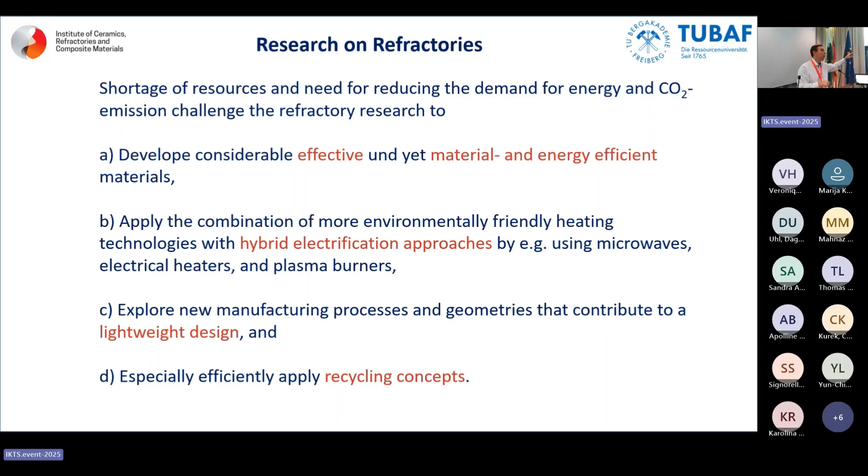So today I will show you some special structures like lightweight design, because on one way we have big masses, but can I make a composite system? That means a thin wall, fine grained, in a big coarse grained system - a kind of marriage to combine properties. We are also going to deal a little with hybrid electrification approaches, and we do not underestimate recycling - not only recycling of our materials, but also recycling and upcycling of refractories from other sources. So for someone it could be dirty, but for us it's a gift.

Imagine we don't speak about small samples, but bigger samples in metal. Especially everything that deals with thermal shock - we saw yesterday very nicely the impact of pore size distribution and pore morphology. So one key in order to get the compromise is the porosity and how you can distribute it.

Yes, with pores or with micro cracks that I can create, I can improve thermal shock performance. But especially if I need a pure material, like alumina, for a gas burner - not so high temperatures like 2000, 3000, but let's say in the range of hydrogen firing - then I need pure alumina, and I have to get improved thermal shock performance. So on one way, micro cracks. On the other way, can I integrate heating elements in my gas burner to improve things, because thermal gradient means thermal conductivity, heating from inside to outside.

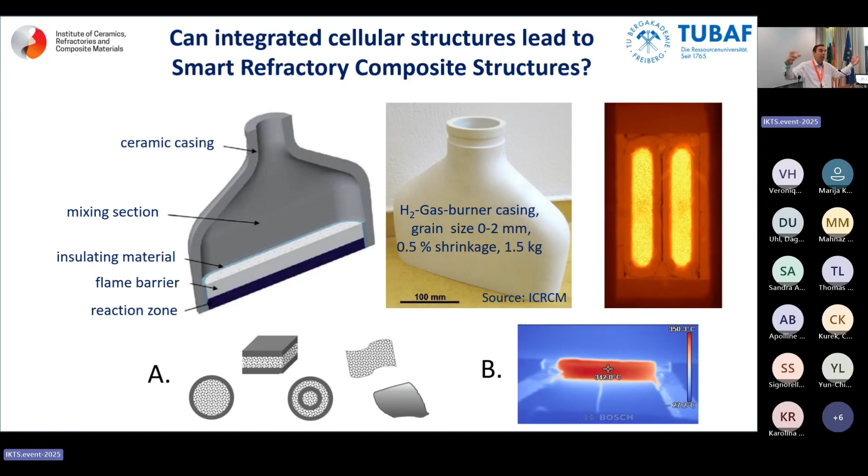So the trip has started - environmental friendly, sustainable, and efficient. And we need the young guys to get this trip together to Ithaka. It's not a labyrinth. We need new ideas to succeed.

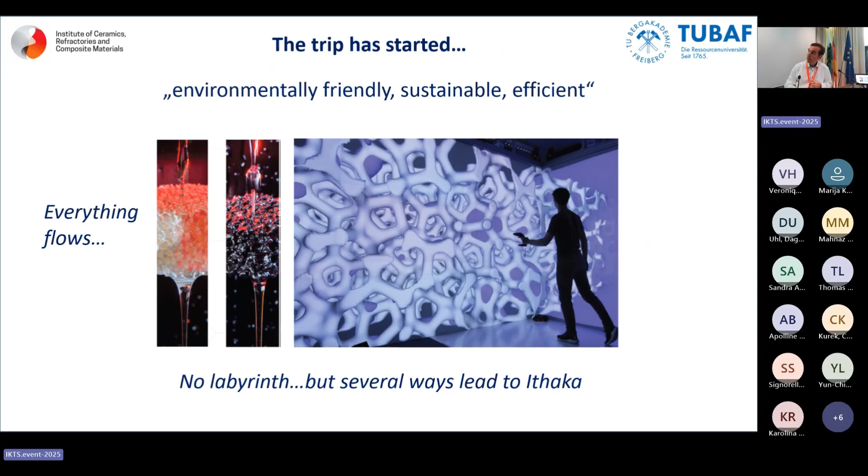And everything is flowing. These are some projects - results from the German Scientific Foundation, as well as with some industrial partners. I would like to start with 2009, a project also called Fire. Some guys from Fire, the real Fire, said 'oh, this is the German Fire?' No - in German it's Feuerfest-Initiative zur Reduzierung von Emissionen, refractory initiative to reduce emissions.

And we have dealt, for instance, with alumina, zirconia, titania systems. Yesterday we saw very nicely the aluminum titanate, how it behaves - it dances, it breathes when you heat up and when you cool down. But in this case, we just formed aluminum titanate in situ and decomposed it during thermal shock.

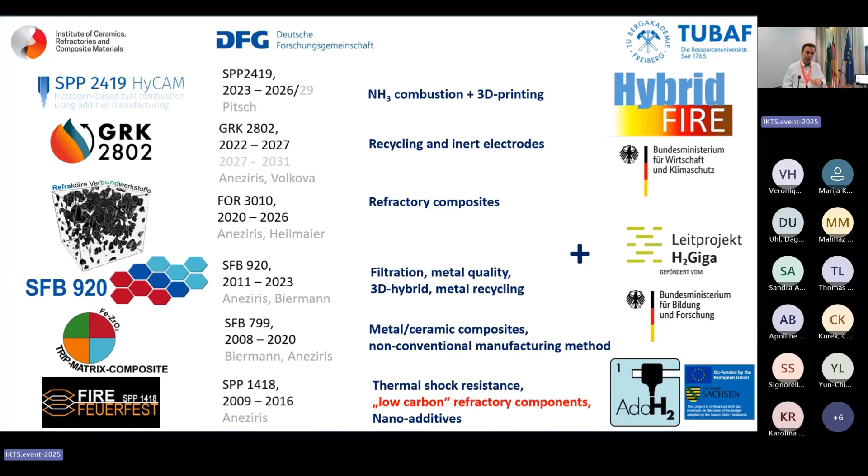Because then you have volume expansions or shrinkage in volume percent. These are grains that explode and make microcrack patterns. Of course, you have to control these things.

Yesterday, Alexander Michaelis showed you the universe of solid oxide fuel cells, electrolyzers, and all these kinds of things. Once again, to underline it, we are here in refractories, but functional ceramics and metal ceramic composites are the key issues for the transformation of energy. And of course, we can combine these issues with our materials.

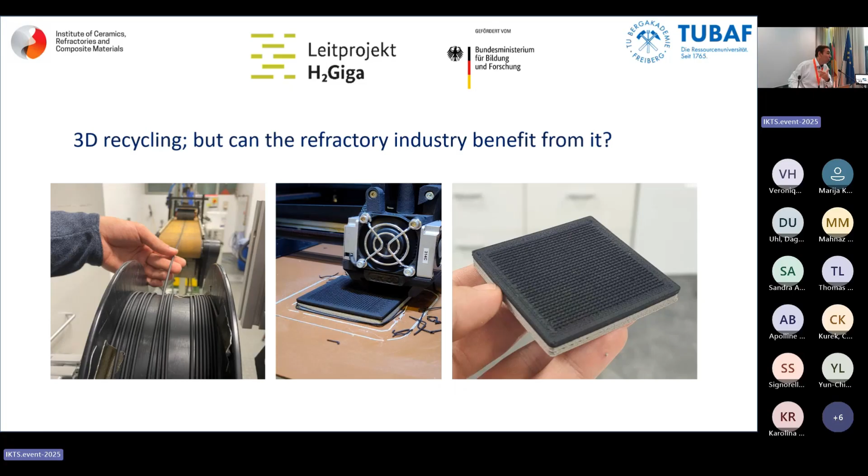Somebody would say, how? For instance, in Freiberg we are dealing with recycling of such electrolyzers. Yes, we can print, we make our own filaments. Here you can see a recycled, printed solid oxide fuel cell. But again, we have some issues with contaminations, which do not give the efficiency. We are interested in the scandium zirconium or lanthanum strontium manganate in this kind of issue.

And somebody would say, how do you mean it in terms of refractories? I can add it in a carbon bonded electrode system or a stopper or whatever. And what we see here is the refractoriness under load.

The red curve is a carbon bonded alumina with 2% recycled lanthanum strontium manganate. And the blue curve is the traditional carbon bonded alumina with approximately 30%, plus antioxidants in the form of something like 4% silicon, pyrolyzed at 800 degrees and pyrolyzed at 600 degrees.

And we see if we add the lanthanum strontium manganate, we can avoid silicon metal, and we can also go 200 Kelvin lower with the temperature. So these are reactions that help us.

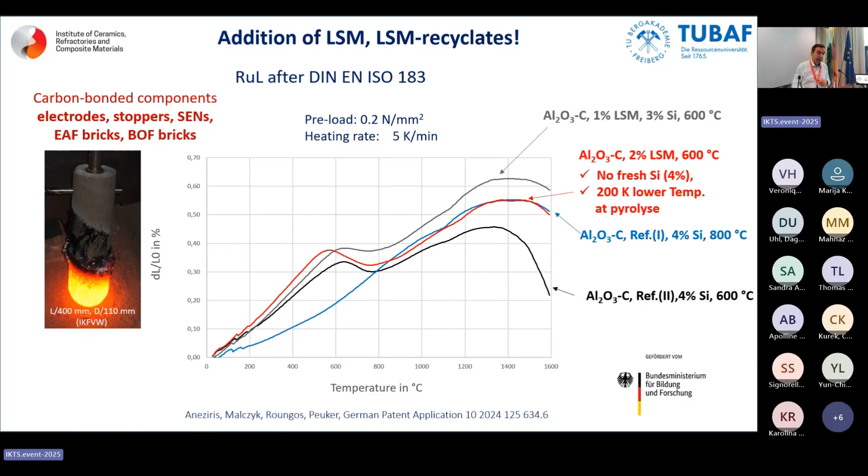If you say additive manufacturing, we started, we didn't call it additive manufacturing, but it was something like 2.5D, making spaghettis, not pizzas, spaghettis. And somebody would say, why spaghettis 400 millimeters? Because we wanted to filtrate pig iron, and the bigger it is, the higher the filtration capacity.

It was an extruded issue, based on silicon carbide. Of course, you can do it also with zirconia, but keep in mind, silicon carbide is an electrically conductive material, a semiconductor, as well as at elevated temperatures. Also, zirconia above 1000 degrees Celsius becomes electrically conductive. Yes, we have also the oxygen and all these kinds of issues, but these are functional materials.

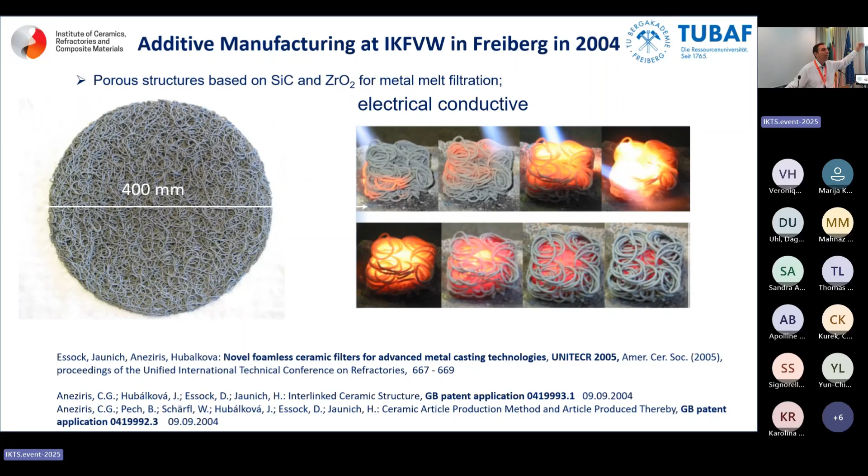We can activate them. And keep in mind, aluminum oxide, above 1000 degrees Celsius, has 10 to the power of 4 higher electrical conductivity. So these are issues in order to meet the demands for going to smart refractories, as Hong Peng mentioned yesterday.

In 2024, my guys are experts today at printing filaments or based on filaments. Of course, you can also cut the filaments and go to pellets. It's much easier because you don't need the flexibility of the filament, and as you know, our materials are not flexible. In this kind of issue, you can use much less binder.

You will see this tomorrow, how we can print and how the printer works. You can make our own filaments, but keep in mind, granulates or pellets need much less binder. So on one hand, and one basic issue for us, is we can do thermal debinding, not chemical debinding. So guys dealing with debinding, this is a very interesting issue.

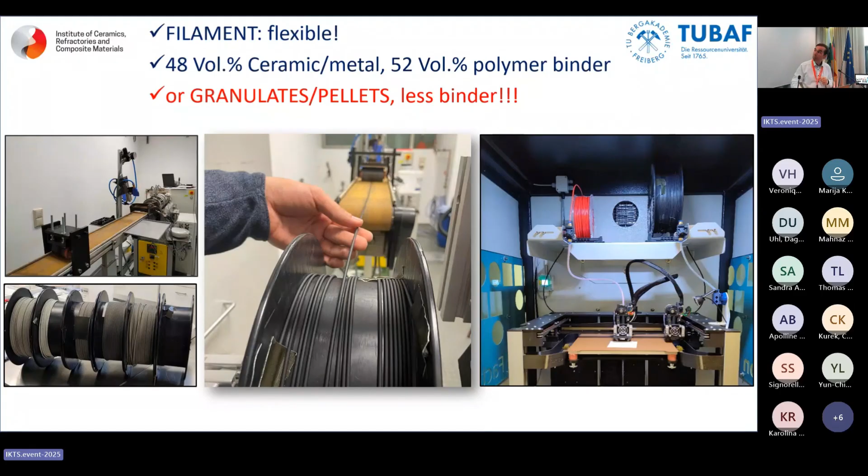Of course, you have to meet the demands of tolerances. So you see, and now we are printing. In order to meet the tolerances, yes, it has to dance. It has to go where you want it to go, no? But not too much. And please stop the dancing now when the music stops.

So this is one very interesting issue. You have to add additives, no, in order to control it. And somebody would say, why are you doing 3D? I'm doing 3D not only to mix or to have the freedom of shapes. Me, as a refractory guy, I can position the pores where I want.

I can position the pore habitus as I want and where I want. This is the key for us. We are not experts at making very high density structures. This is not the key.

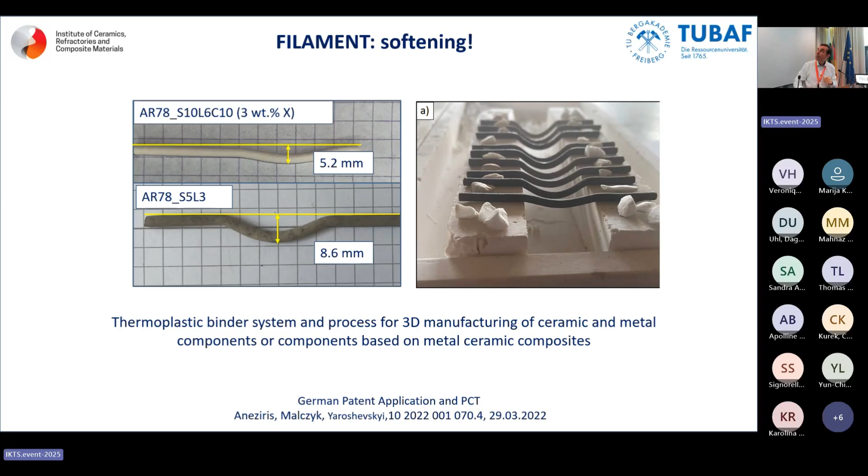Yes, we want to make macro pores, macro channels, where I have to be tight, high density, corrosion and erosion resistant. But the structure behind could be not so dense, in order to be able to withstand thermal shocks. No? Play with materials.

We see you can make steel inside if you want to fix it with an anchor, and ceramic outside. And of course, as John mentioned, you will have a distribution of the phases, as a gradient structure, which could withstand thermal shocks.

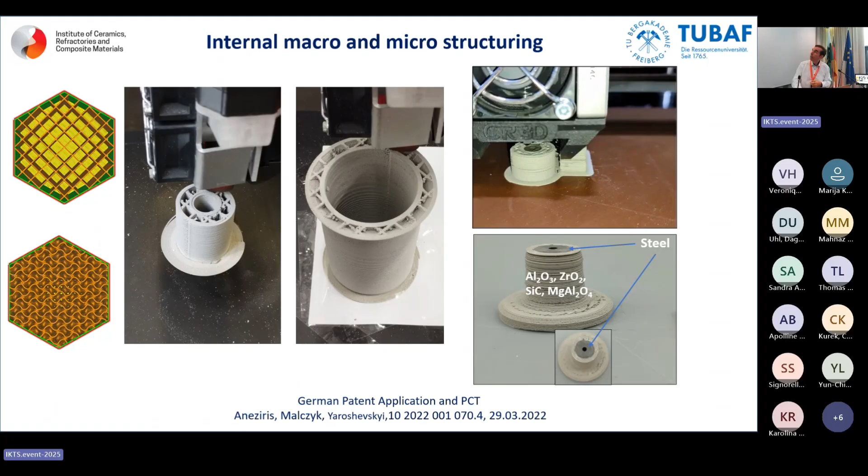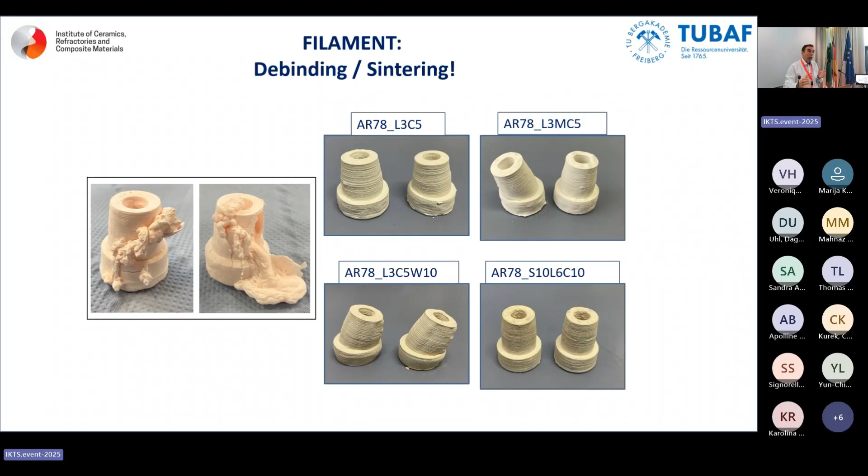Of course, up to coming to this moment, you can make arts in the beginning, as we see on the left. Perhaps the price is much higher from the original. But at the end of the day, if you control the debinding and especially the sintering, yes, you can create such kind of nozzles after printing, after sintering.

You have an inside with special properties. You have a light structure between the outer, and of course we know you can. It could be that the outer is like a belt and puts under compression the inside, so you improve the thermal shock performance on one way.

On the other way, we have a filament, so layer by layer, and this is something like the aragonite structure. And if I can also make micro cracks, we know from the flame spraying processing, I have excellent thermal shock performance. Okay.

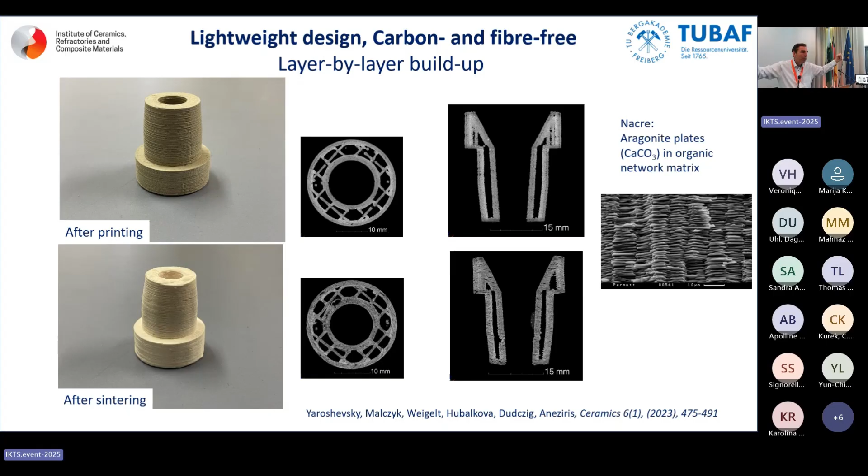Yes, today the printer guys, they can print pore structure, and then you can also machine in green stage. So you have the porosity where you would like to have it, and you can close the pores via machining. And high speed.

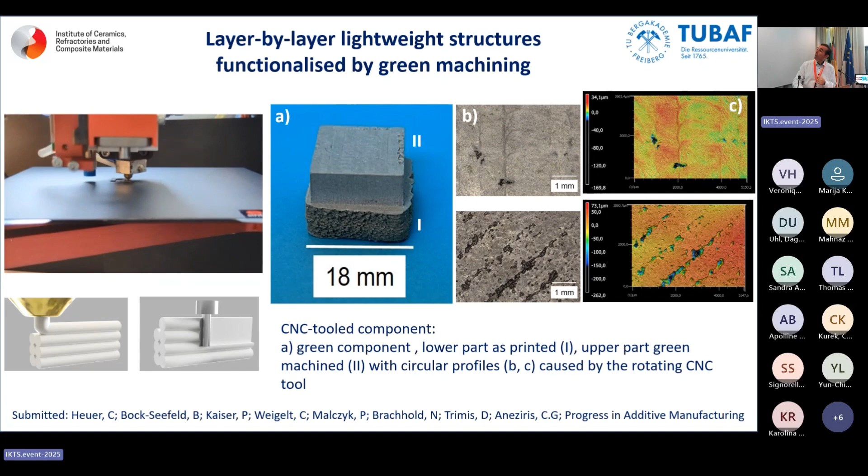And then, of course, if we make the piece, I have a fine-grained refractory material, and I have integrated it in a coarse-grained refractory material. I'm going to the steel casting simulator that we have in Freiberg, you'll see it tomorrow.

Yes, it's a drop in the ocean. It's only 100 kilograms that we can melt, but we can select all the insides and outsides as we wish. We can design the steel.

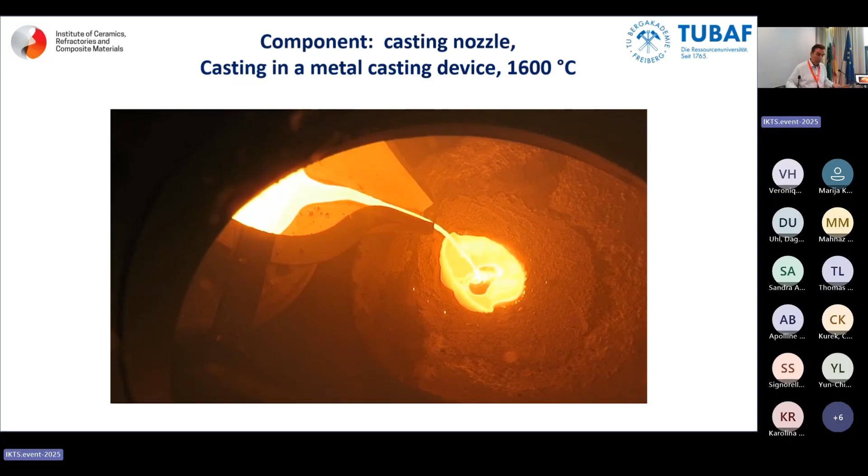This is very important. And somebody would say, okay, nice talking, do you survive? Yes, we survive. So steel melt in full controlled atmosphere, so we know what we are doing, hopefully. And we see that we survive.

A pure oxide, and it was a spinel. It was an alumina Almatis 78 spinel. Survived. It was fiber-free, because they burn fibers out, carbon-free. Yes, we are dealing also with carbon-bonded alumina, but we put self-glazing systems.

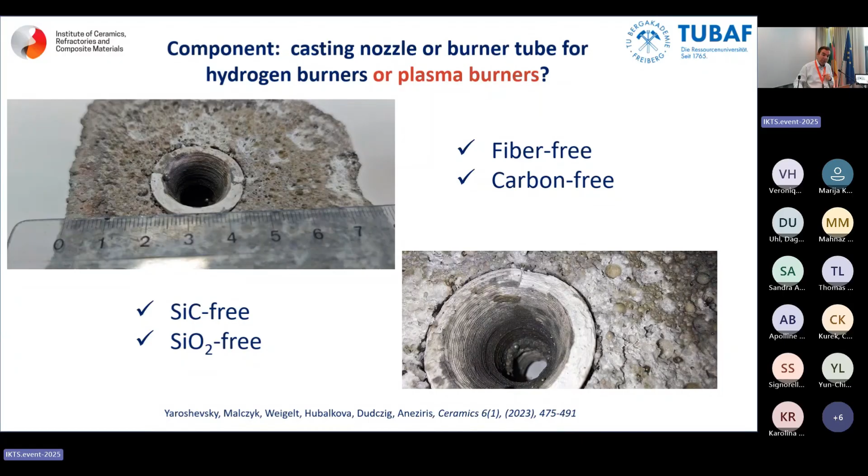Silicon carbide-free and silica-free. And yes, if you survive, is it perhaps a material or a processing route for hydrogen burners or for plasma burners? Plasma burners we will see immediately.

And somebody would say, is the technology very difficult? No, it's the normal ceramic technology as we know it when we make extrusion, okay, with filaments, and then we go to printing and debind pieces.

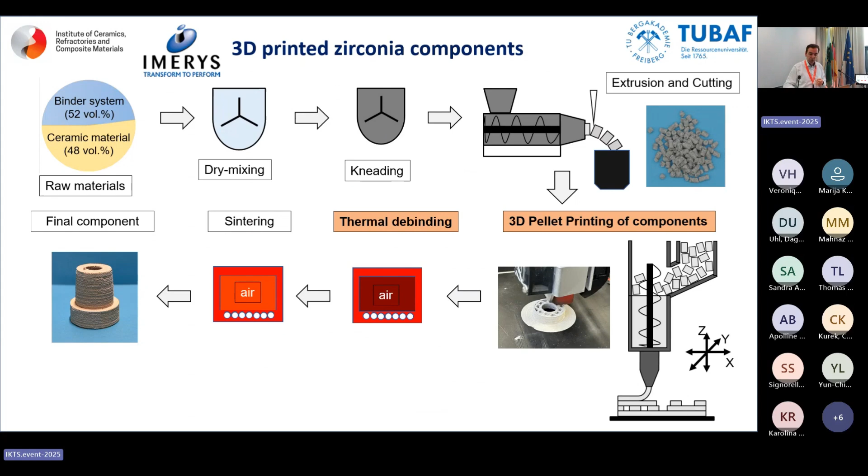Some pictures, yes, you can play and you can use artificial intelligence to create structures, and so it's fantastic, but okay, it should have a meaning - how many layers you do, why you do it, and keep in mind costs, energy, and so on. And at the end of the day, you want a functional product.

And I will stay to zirconia. And we see also IMERYS, it's a project with Chris, because zirconia is a very fantastic material. We know monoclinic, tetragonal, cubic.

The question is, what kind of phases do you really need? Not a fully stabilized, no? You need a high amount of tetragonal and tetragonal metastable so that you can create, when you need it, cracks.

Of course, you have always to pay attention. You have at 1170, for instance, in a special system, the transformation from monoclinic to tetragonal or tetragonal to monoclinic. Do my microcracks that I have created, are they still there or are they healed?

So you have always to create microcracks, but you have to keep in mind, I want to have them when I need them. Take a part of a submerged entry nozzle. It's first preheated up to 1100.

Then it moves to the casting machine. It goes down to 900. And then you have a thermal shock upstairs, to 1600 when the melt comes.

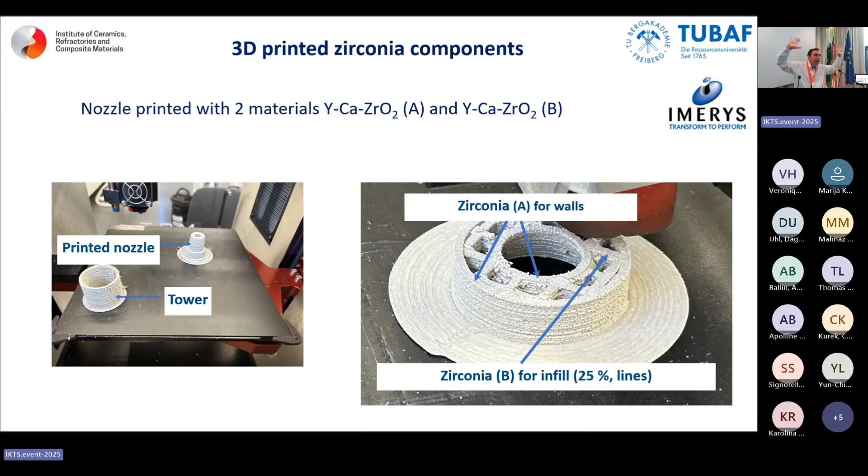And of course, you have to keep in mind, it's a product - after it has been used, it's going to lose its neck. It's a one-way product. It's not going up and down like a ladle. So completely other design, and keep all this always in mind.

Yes, you can play with the zirconias and you see a double kind of stabilization. Why? Because we have found out that the tetragonal is very important. Yes, you have also, based on the monoclinic, due to the expansion, created grains of monoclinic. Yes, but you lose some of them when you increase the temperature. So you need them and you have to trigger them when you really need them.

And during sintering, you lose some of the stabilizing agent. So you want to have a support of the other stabilizing agent and get in touch with something else which also improves the compression. Somebody would say, how do you know this? Yes, you can use EBSD, electron backscatter diffraction, and you can, in the scanning electron microscope, identify the phases. So the tools as they were when I did my thesis are today in such a state that I would like once again to study.

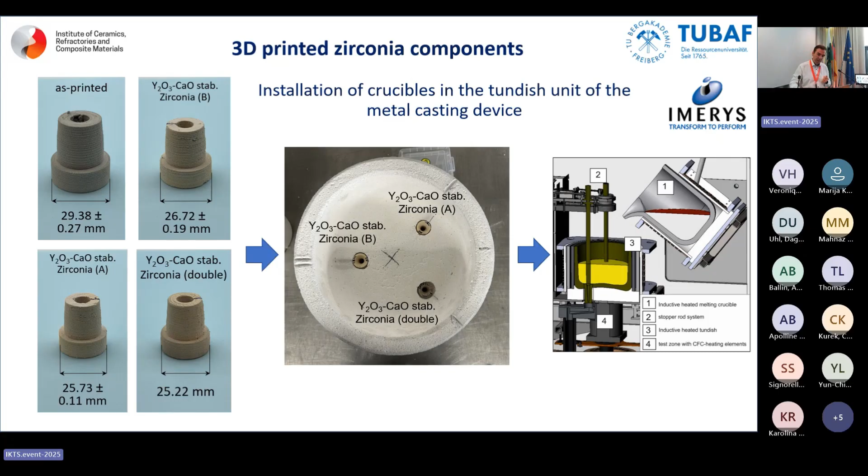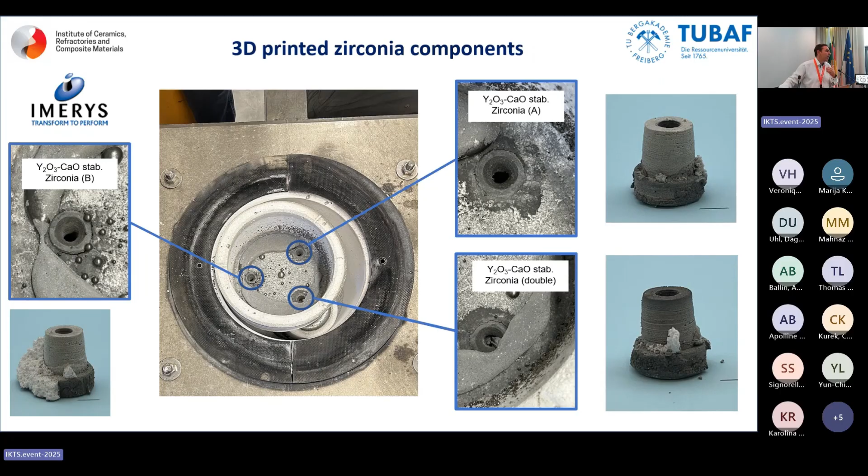Yes, you survive thermal shock, and you several times survive the thermal shock, in spite of the fact that it is a fine-grained zirconia material as it is used in solid oxide fuel cells. Of course, not scandium and this kind of things. It's magnesium or calcium or yttrium. And of course, you can design everything that you need. This is a fused alumina system. You can make nozzles, crucibles, and you survive.

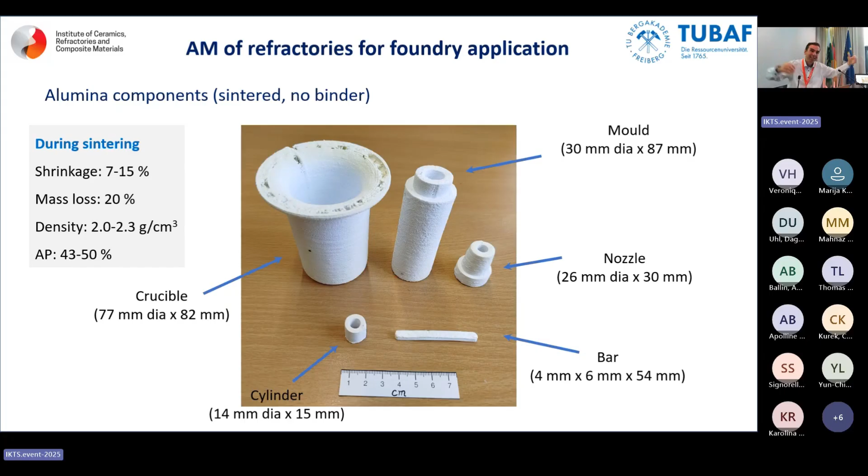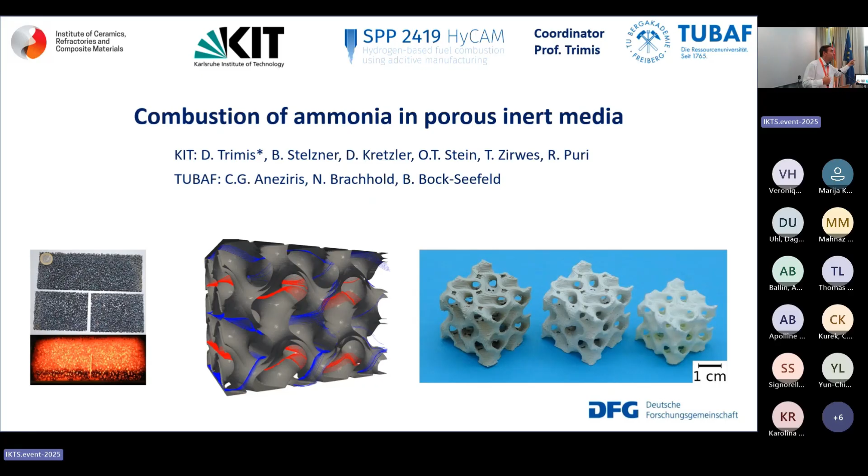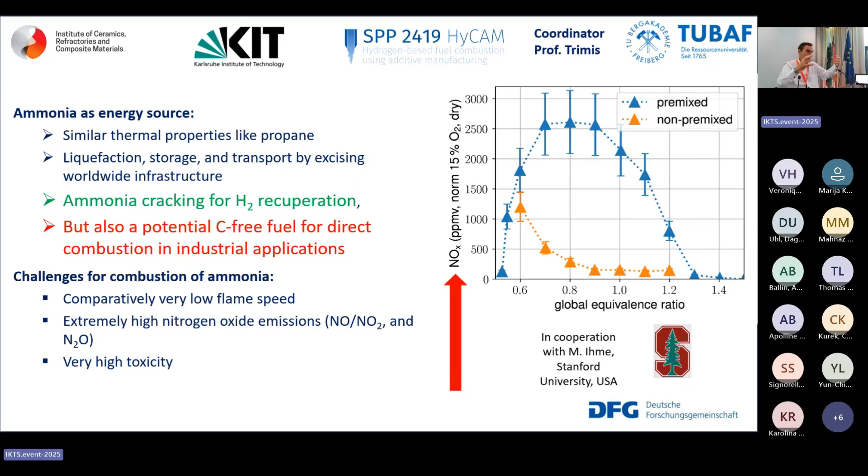Somebody would say, is it an easy issue? And why do you want a special gyroid structure? It's not a foaming structure, it's a gyroid structure. Why? Because if you put air and directly NH3 to fire H2, you will get a much higher amount of NOx. And you don't want to say CO2 out, but NOx high. So you have to get a compromise of the processing issue.

And it's not only a gyroidal structure, several pore structures have to be combined, have to be engineered by young guys like you in order to meet the demands of the combustion. And you have to do it not only fine-grained, you have to do it also coarse-grained. Because you don't need only small issues, you need also big issues. Yes, again, you can print, you can pelletize, you can make some kind of gyroidal structures. But of course, you can use also two nozzles.

It's going to change because I want to have, for instance, alumina. Alumina is the material, but I want to put silicon carbide in the inside in order to improve the thermal shock performance. Or I want to put an AZT system. And we see here the behavior, the crack resistance of this material, where we have added 2.5 magnesium stabilized zirconia and 2.5 titanium. And we see this kind of behavior, not the classical, as we have it in ceramics. So it's like a sponge according to the heat, the mechanical stressing of the material.

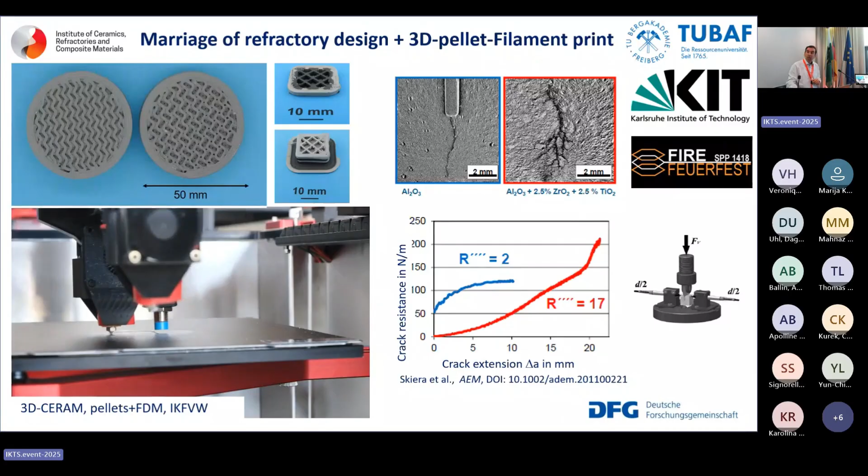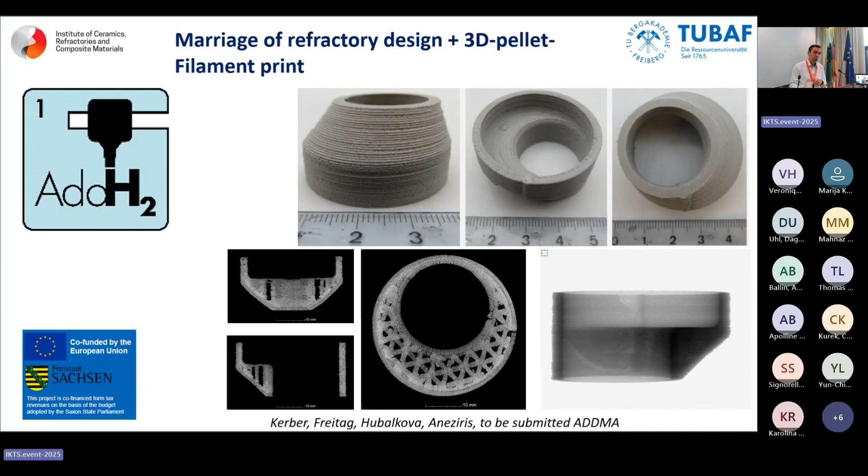And of course, if you have good materials in means of thermal shock, you can also think, yes, let's go with pure alumina and make H2 approaches. I've spoken about microwave plasma burners. Somebody would say, why? On the one hand, it's a direct use of electrical energy, so I don't have to transform it. Yes, if I have to store, but I want to use it immediately. We do not have a microwave coupling, as we did it in 1991 when I was in Nottingham. We only heat the air, like a CH4 burner. And we do not need any cathodes.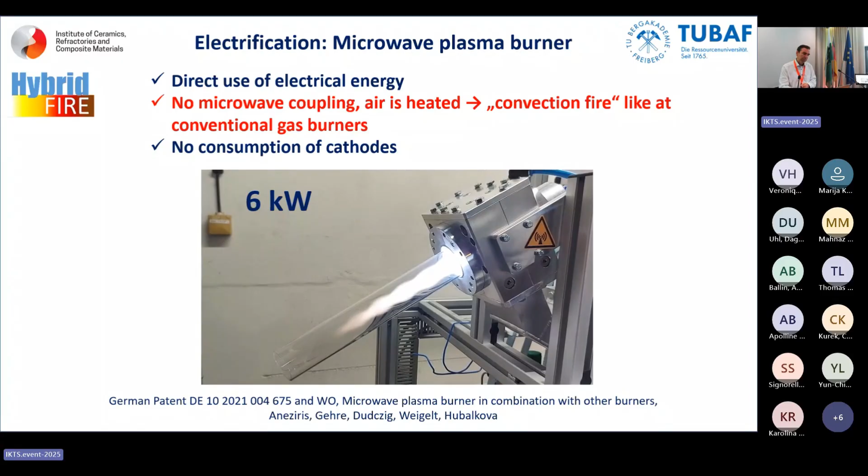It's a little bit loud, but it's an easy approach, something like 6 kilowatts. We have started with this system. Of course, somebody would say 6 kilowatts, it's not enough. You have to increase. And of course, we want to go to this technology, and not only microwave plasma, but also induction plasma and so on. Why? Because sintering is the most energy intensive process with approximately 70% of the whole energy consumption. And keep always in mind, if you have a tunnel kiln, only 10 to 15% goes to your component. Everything else are losses.

Of course, if we are going to be successful, we would like to put it at an industrial kiln to see how we go from the laboratory to a really industrial application. And the red arrows that you see here are 65 CH4 burners. Of course, we want to do it successively, step by step.

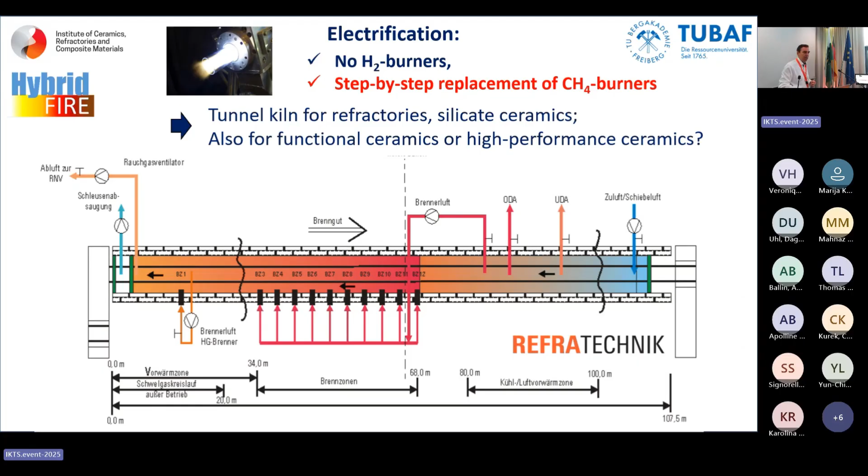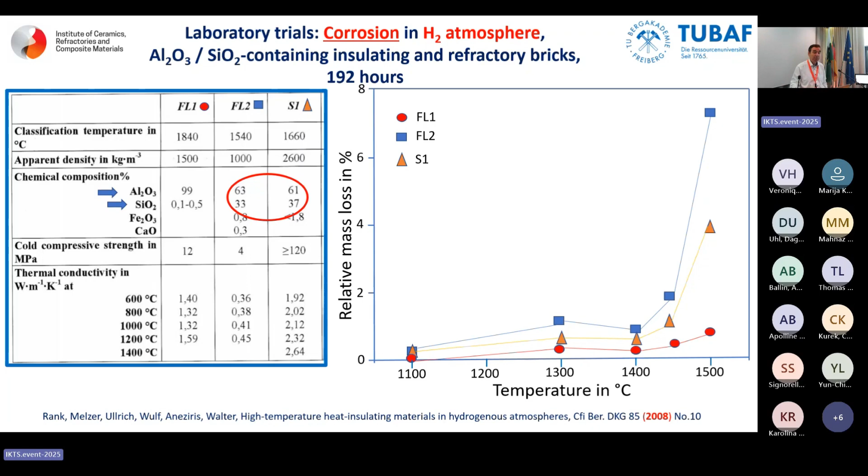Somebody would say, why? The why we have seen yesterday, because when we have an H2 atmosphere, we have H2O atmospheres. And we have seen here in 2008 the impact that if we have not used pure aluminas, but also alumina silicate systems, above 1400 degrees, everything goes in the air. What we have done is we have made a pre-treatment of original MgO-based bricks for the cement rotary kiln, and we have used 200, 400, 600 degrees temperature in a pre-treatment, natural gas 100%, 100% hydrogen, the blue ones, and a 50-50. And then we have fired them in the Refratechnik kiln that you saw before at 1600 degrees Celsius.

I would also like to underline, pay attention, the 200 degrees pre-treatment with hydrogen gave us very high strengths. If you go to the paper, you will see, based on differential thermal analysis, that the peaks of the calcium silicate formation or changing, also the brucite formation, have been a little bit shifted. It's not only thermodynamics, it's kinetics and thermodynamics.

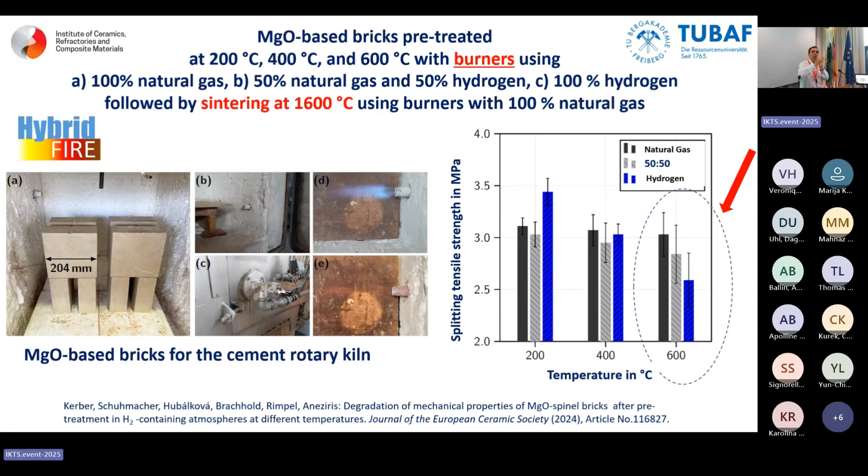Okay, yes, the small one, the 6 kilowatt, was above. Of course, we have also microwave, and we have approximately a 1 cubic meter furnace. We have a 100 kilowatt microwave plasma burner, 65 CH4, and electrical molybdenum disilicide heaters, so electrical heating elements.

It's the same trick as Bengt did yesterday. She can move the pictures. So the picture has to be like this.

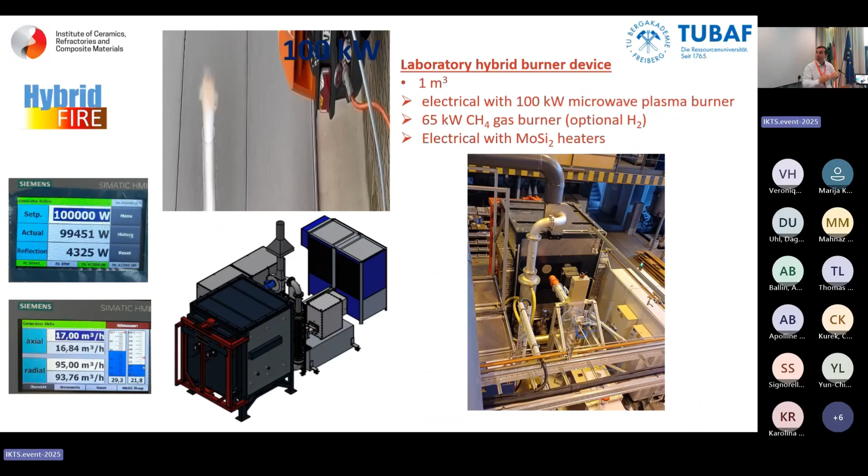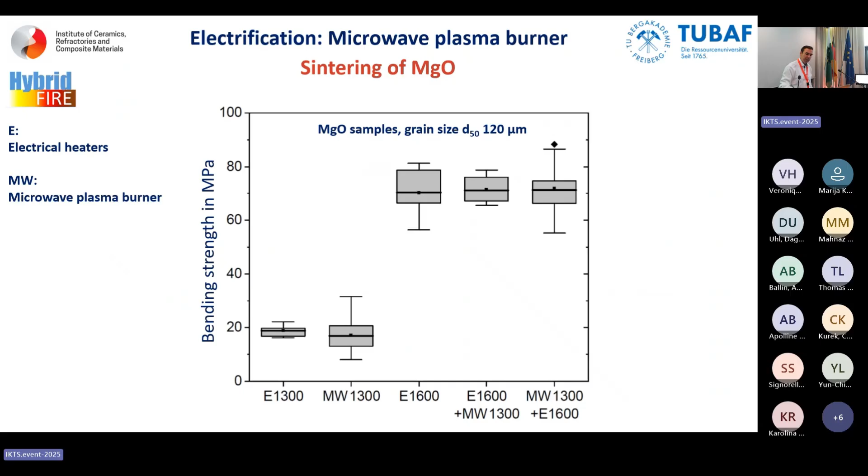We have done this. Marie Oppelt and Christine Dietzer have dealt a little bit with magnesia. We are in the same area of strengths. I don't want to go further. We have fired Tosoh 1.5 yttria stabilized tetragonal zirconia, so a high-tech ceramic. And we have seen we can heat faster. And not only this, keep in mind, I have a burner which is circulating the temperature. The other was conventional heating elements.

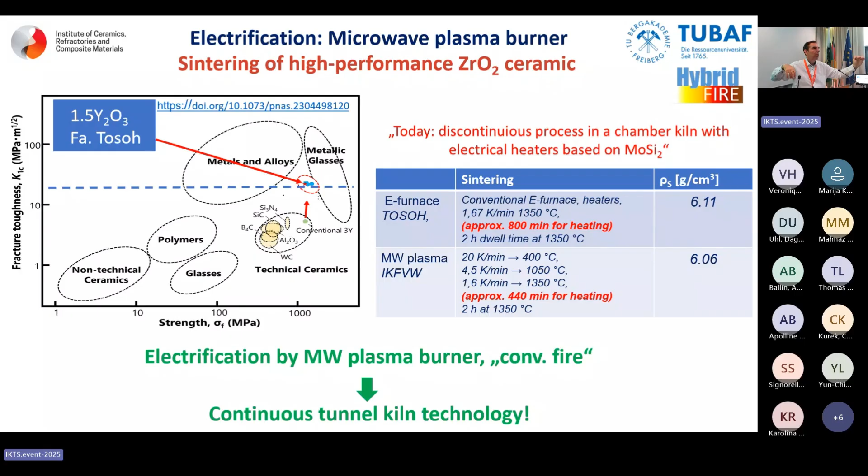As well, we have treated some bricks, alumina-rich bricks, which were in contact with a melt, iron melt, steel melt, and we have seen we have much lower wettability. We have a 10 plus increase of the wetting angle. Somebody would say why? Because the plasma burner has NOx, the plasma burner has O3. The plasma burner creates radicals. You always have, on the one hand, positive issues, but there could also be bad issues. NOx is not healthy. Ozone is also not nice. It smells like a chlorine environment.

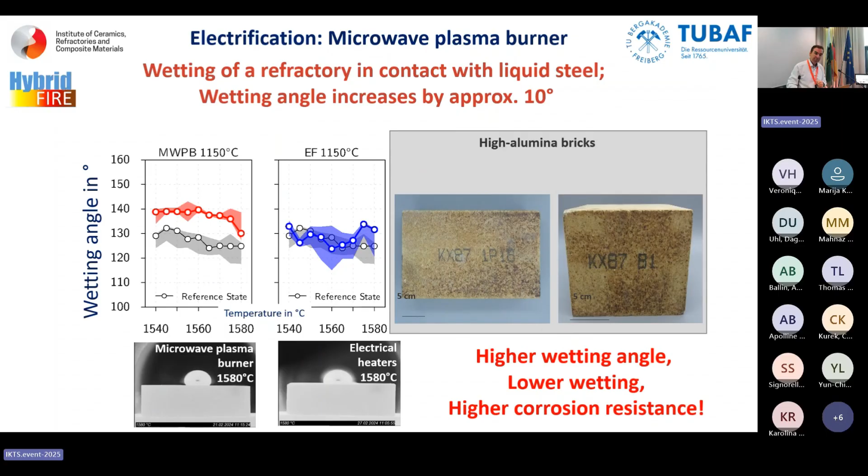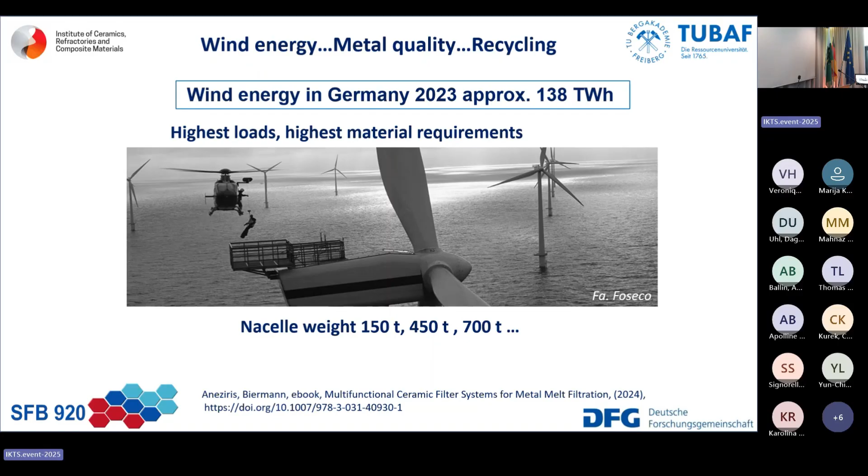Somebody would say, what was triggering this? It was an accident that happened with the ICE train in 2008, where very nice, dense, fine aluminas in the range of 200 up to 400 micrometers could not be removed out of the wheel, and so we had the damage. I suppose for 8 months, the ICE train was not moving in the whole of Germany. This was good for us because we got a project.

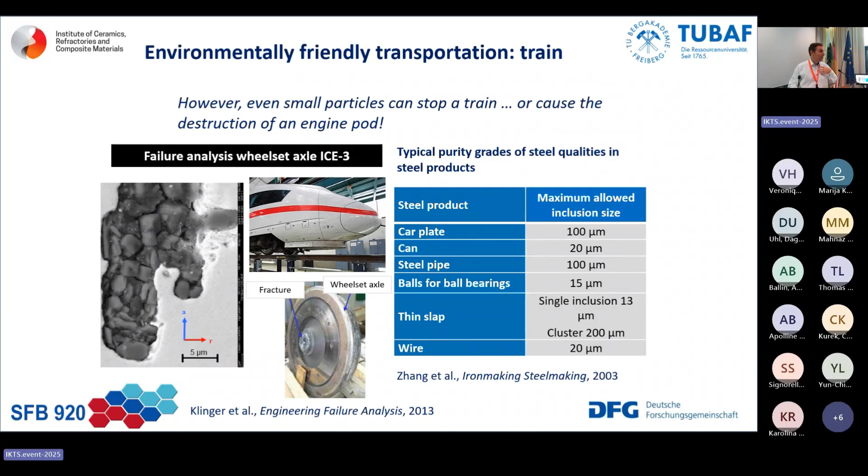We're under a confocal laser microscope. This is in the Steel Institute, Professor Volkova, but the guys are here also. And we have placed an alumina, and this alumina catches the small alumina in situ inclusions. And this was the starting point where we said, okay, let's put the same chemistry in order to pick up the same chemistry of the inclusions that are created in the steel.

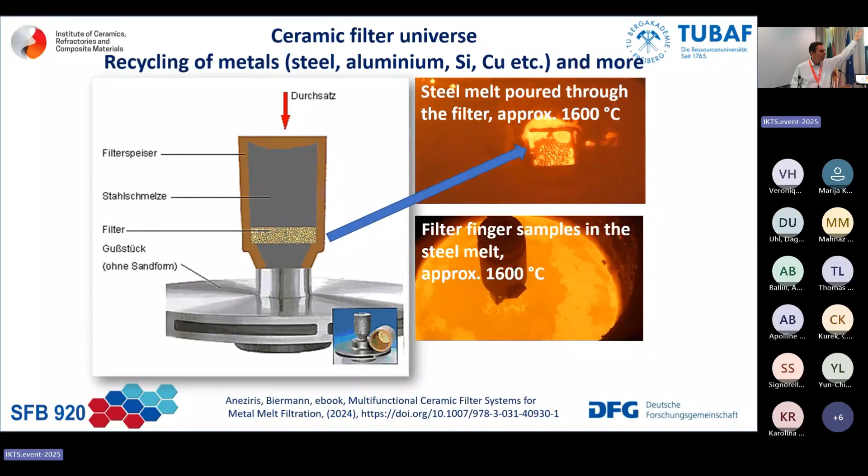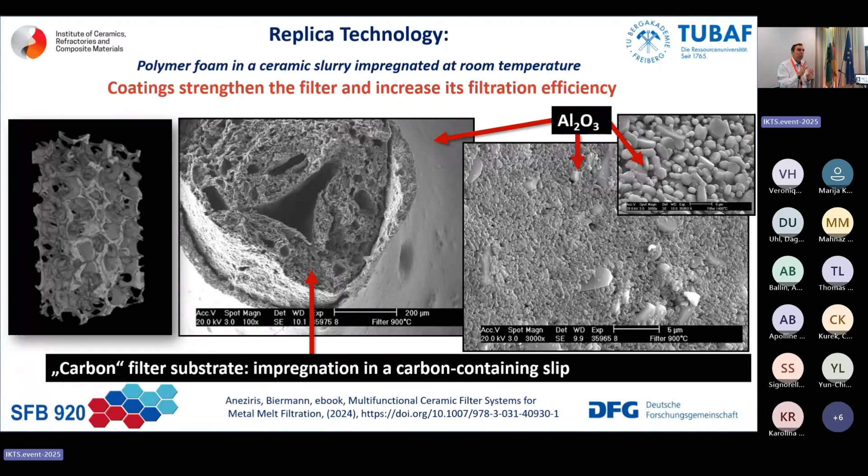Of course, the steel melt can be cleaned through the filter, or you can also use carbon bonded alumina and make bubbling in the melt. And then you can, via buoyancy forces, select and pick up like a porous plug is doing. Of course, you have to design the structure. You have to put in the carbon bonded alumina. So this is a carbon bonded alumina. You have to put aluminum oxide on the top, but you have to pay attention not to sinter it very tight, because you want to breathe with the melt, to have an exchange with the melt.

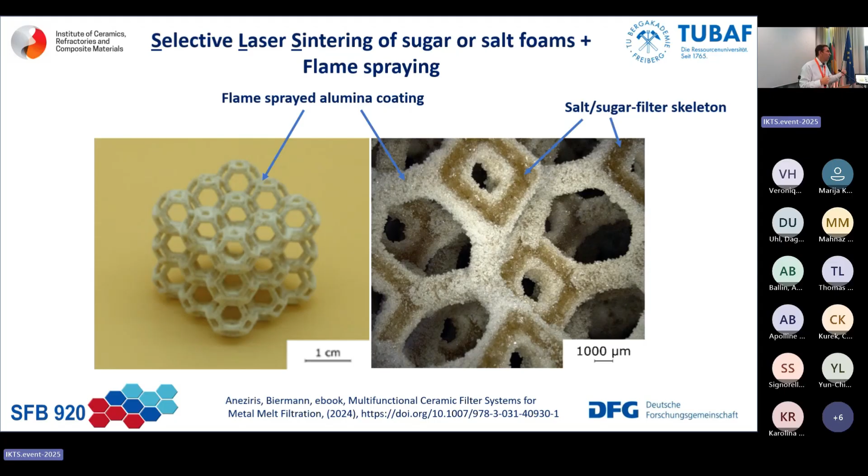Of course, if you are young, not me, my colleagues, my staff, yes, you can print sugar or you can print salt via 3D printing. And then you can go via flame spraying and create the structure. Somebody would say, why? Because I can wash it out and I do not have to burn out the polyurethane foam, the template. And you also have flame spraying, you are going to see it with the robotics. So you can not only make thermal shock, you can create some structures. And then you go to the steel casting simulator and you survive.

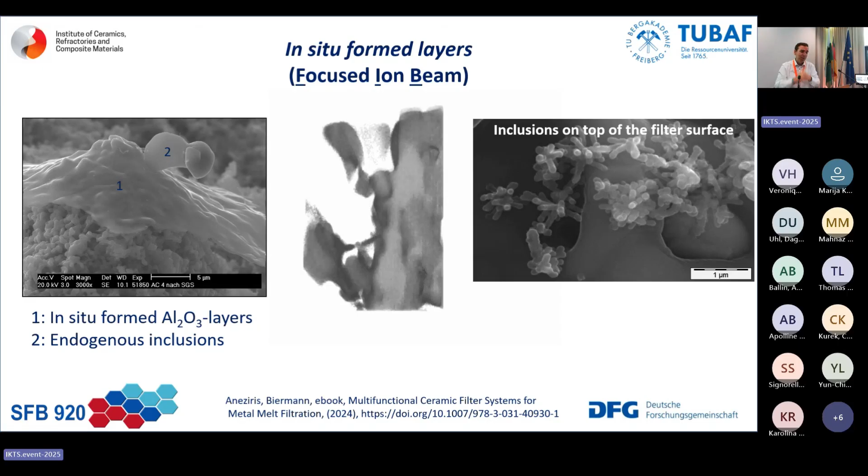And of course, today you have to go in situ with focused ion beam in order to be able to characterize much deeper these kinds of layers that are created and are collecting the deposit. In this case, a positive one. Emmanuel showed yesterday a bad deposit. Here is a good deposit because we pick up the ceramics out of the melt and we deposit them on the ceramic. It's a very interesting issue because, only this number, yes, you can filtrate up to 95% of the hard alumina inclusions in a steel melt.

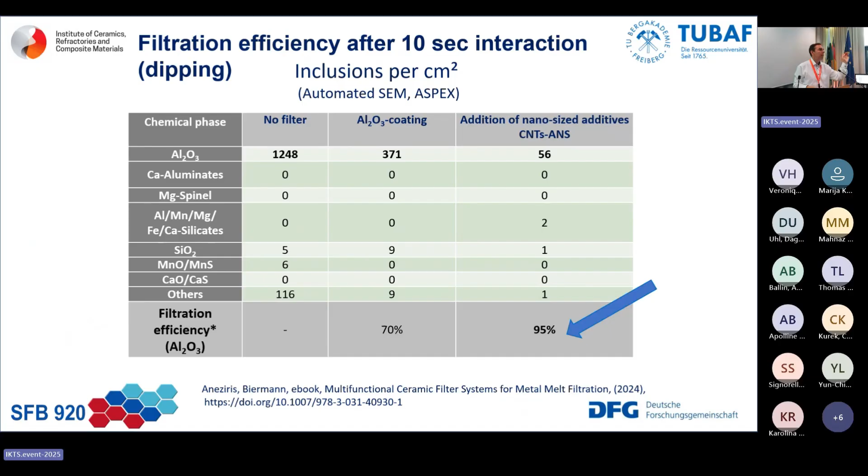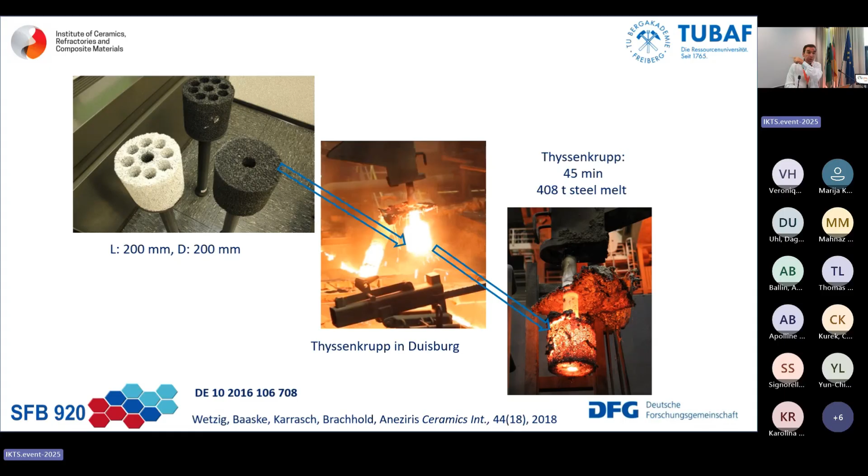The fantasy is free. You can generate a cosmos or a universe, as we say. And of course, you have to go also to the next step. You have to say, okay, let's go to a step where we can apply it in a steel plant. So yes, it has happened. It works. So this was the filter package so that we can go via the slag line and not be destroyed in the slag line. So we want to collect inclusions. The steel plant, I will only show when it comes up.

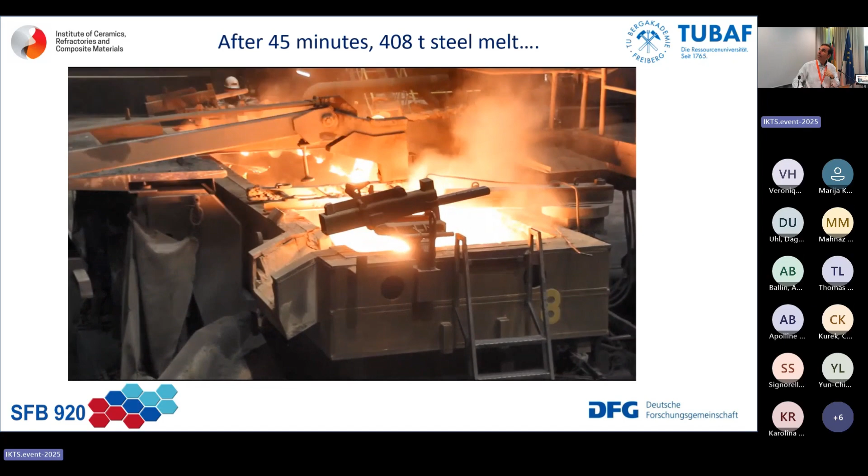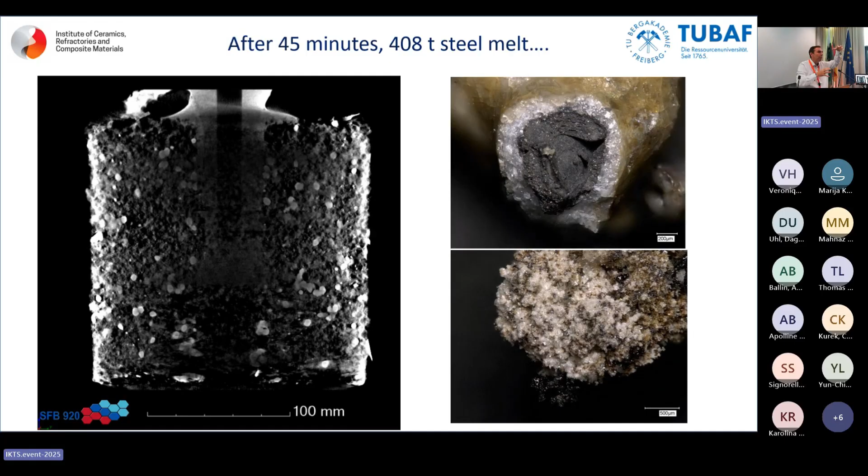And it survived because the deposits, that means the inclusions, sealed the carbon bonded alumina. So you can use the chemistry in order to improve the performance of your component. The bad things, combine them for the good things.

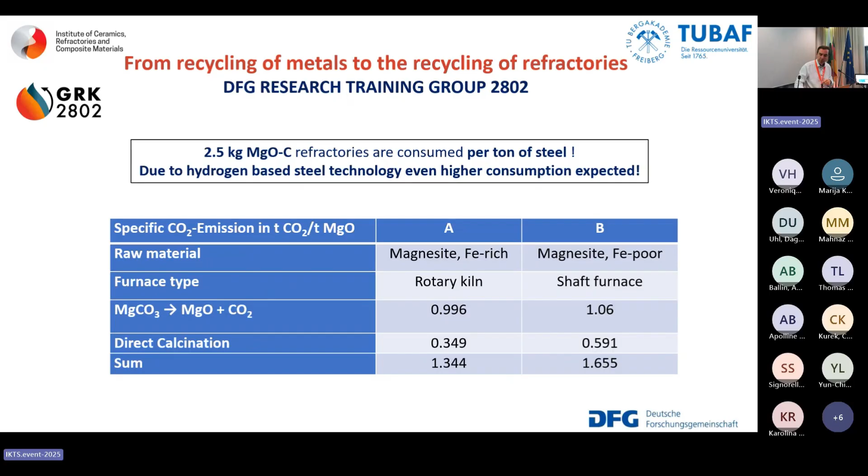Okay, let's go from the recycling of metals to recycling of refractories. It was already mentioned yesterday, regarding MgO-C bricks, for instance. And we have 20 guys here with you that belong to a school of the DFG, this 2802. This is a number. But the number means that half of them are dealing with recycling. That means they pick up MgOC refractories and they combine them with environmentally friendly binders. So no pitch, no resin. Let's use tannin, fructose, collagen. Do I get residual carbon at the same height? Do I get the strengths after coking? You can discuss with them today and tomorrow and during the ECerS.

And the next idea was, okay, let's pick up the MgOC, make MgO, and make a marriage with steel. We have made in the past, also in another center, metal matrix composites. We have taken zirconia and we have taken a TRIP/TWIP steel, and we have made a composite system and we increased the strength and the elongation of the steel via the zirconia destabilization in situ. And then we said, okay, if we can do this, let's pick up magnesia, pick up steel, make again the marriage. Why? Because I wanted to create carbon-free inert electrodes. They are not inert, they are also reacting, for the aluminum electrolysis. So get rid of CF4. Get rid of CO2.

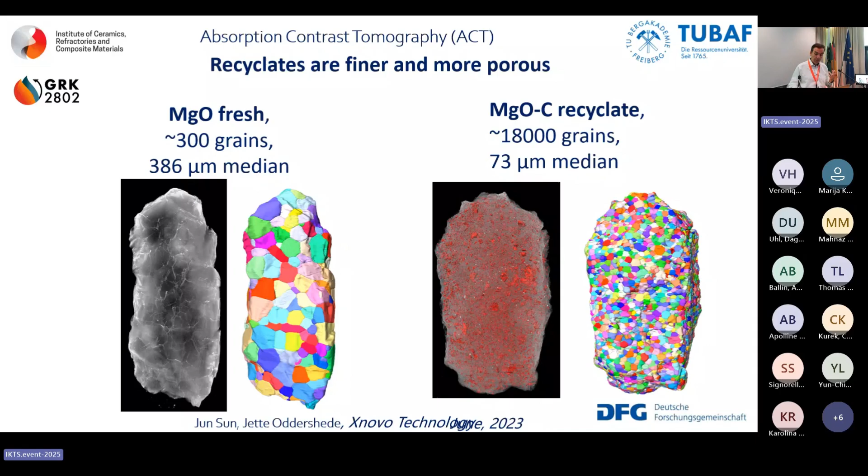Yes, the recycling is something that works, but you always have to pay attention. This is magnesia fresh. This is magnesia recycled. The grains are becoming much smaller. Porosity is increasing. It's contaminated. And the most important, the calcium to silica ratio is also decreasing. You lose calcium. And you need calcium, the calcium silicate phases and so on, in order to meet the demands of creep. But if you go and measure the inclusions in the steel casting simulator, you see, due to the fact that you have a saturated material, you decrease the interactions.

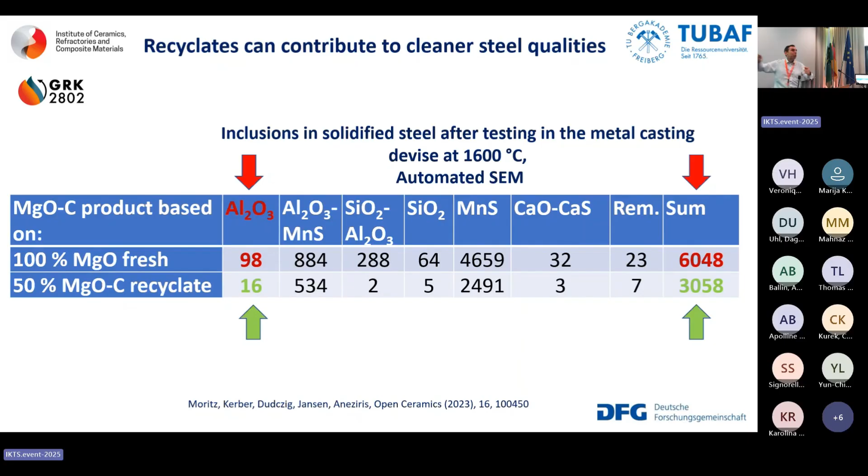Okay, let's go to the marriage of MgO recyclate with steel. You have to sinter it. Somebody would say, which temperature? Not 1600, the steel is away. 1370, 1400 maximum. Where do you sinter it? In argon atmosphere, in a carbon heating element containing furnace. You will see it tomorrow.

You sinter, and then you have to pre-oxidize. So you create spinels or other solid solutions, as we saw by Inho Jung. And this can protect or decrease the interactions with the aluminum melt. Keep in mind, when you see the presentation of Alexander, in the anodes, especially in the aluminum electrolysis, you create oxygen. So you can have also an in situ oxidation of the metal ceramic component.

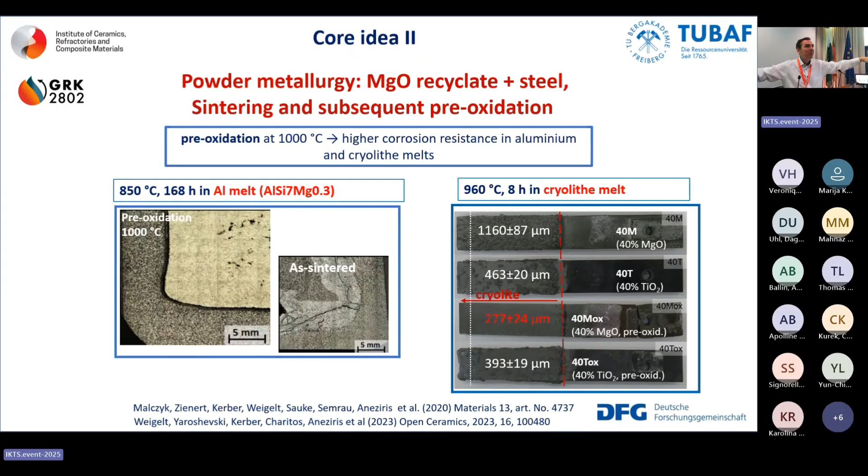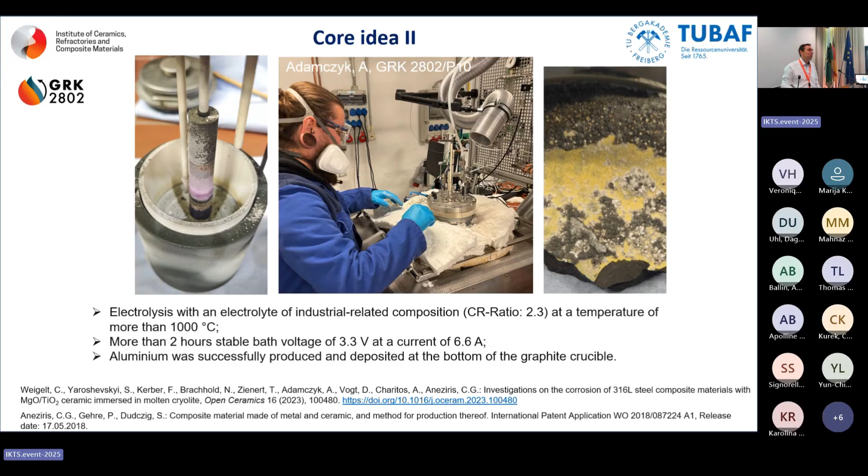And we have here, perhaps you can see him somewhere. Here it is. He's there, and with an electrode of the other guy, Serkin, they made aluminum out of it. Or you can make screws and all these kinds of things. It's the ceramic technology to a metal ceramic composite system. And these are preheatable electric conductive systems, not for steel applications, but for aluminum.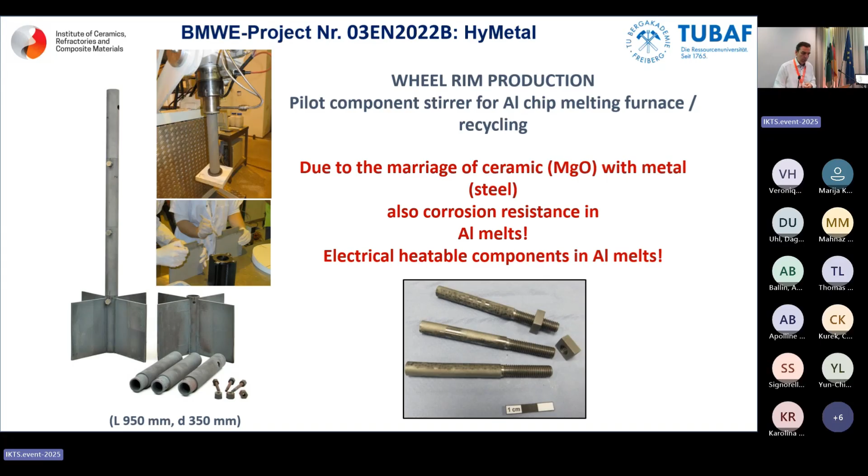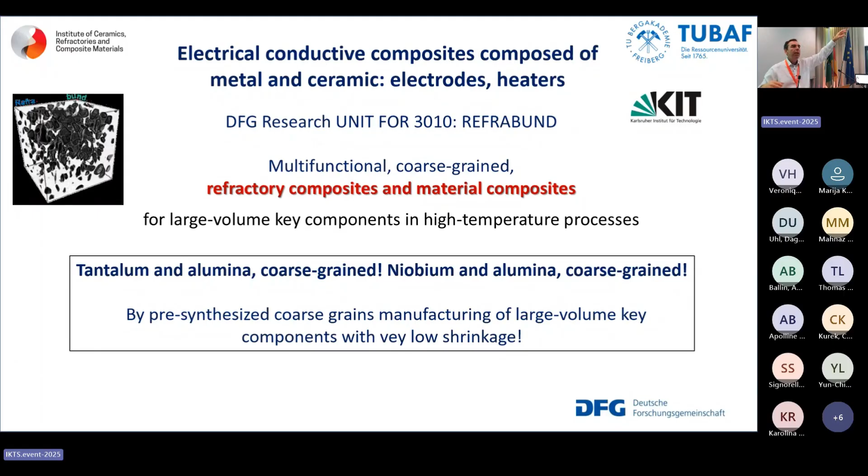And of course, because we had John before, let's go to a marriage between refractory composites and material composites by getting refractory metals, tantalum and niobium, and putting them with alumina. Somebody would say, yes, this is well known. Yes, it's well known, but let's get one puzzle more. Let's make big grains as we have in refractory thinking and pre-sinter them. Why? I want to take out the shrinkage. I want to have a pre-sintered product, coarse-grained metalloceramic.

And if I do this, I can make big components. I can make big electrodes. I can integrate these electrodes in pure alumina systems. Tilo Zienert is going to speak Tuesday, Wednesday, I don't remember now.

And somebody would say, oh, it's a very crazy issue. We have also a guy, Gregory from KIT, they measure the electric conductivity. And you see, you need not so much niobium in order to get the percolation. That means electric conductivity already at room temperature. And of course, it's a grained issue, with pores, as we know from refractories. You can recycle them, you can reuse them, and then you have interesting electrodes.

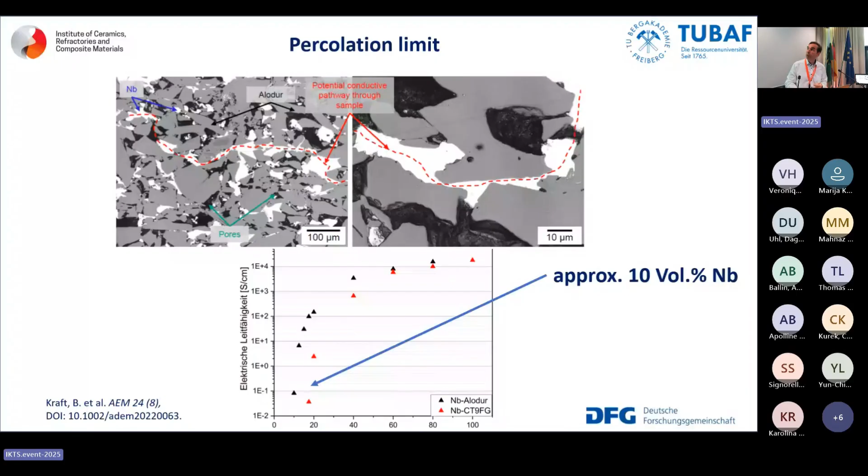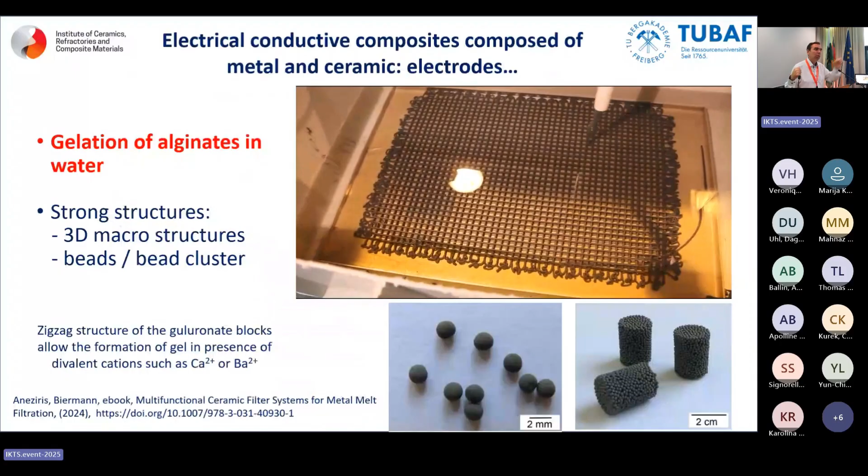Via the alginates and gelation, you can print in water. This is nothing else than chocolate formation. These ones are made by this. Or you can make metalloceramic paper. And somebody would say, why are you doing these issues?

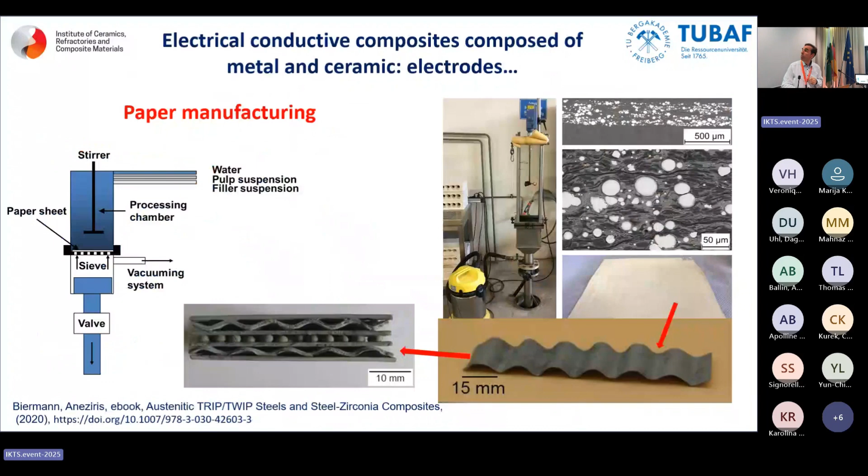Yes, because if you have a gas turbine, and I have worked a lot of years with the guys, you have the heat shields. These are alumina mullite systems. It works up to 1300 degrees in case of normal combustion. But if you go to H2 combustion, you have problems. So you have to get the mullite out, or you have a heat shield as we do it with a pressure slip caster, and you integrate a 3D heating element.

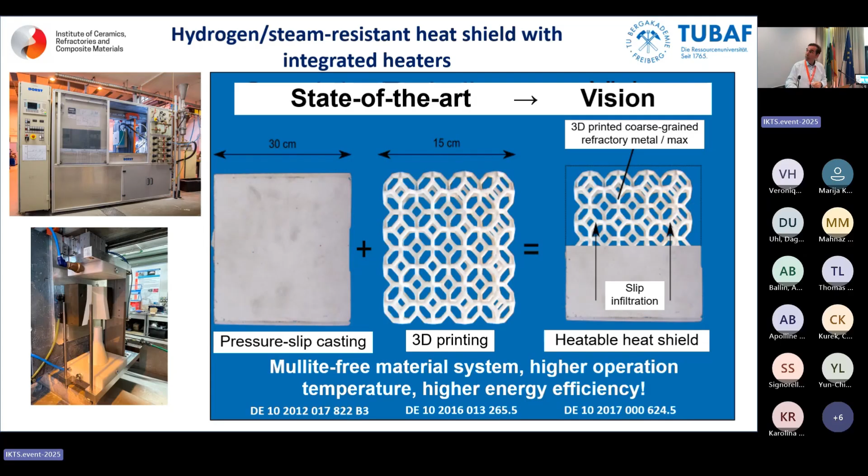Then you don't have the thermal shock problem, and you can increase the application of the gas turbine. And this is a Carnot gas turbine. It means the higher the temperature, the more positive the impact on the efficiency. And if you think like this, I showed you in the beginning a self-glazing carbon bonded alumina stopper, electrode, whatever you want. What if we take the carbon bonded part and put it inside as an electrode, and leave alumina outside, because alumina will not have the interactions with the steel and create alumina inclusions?

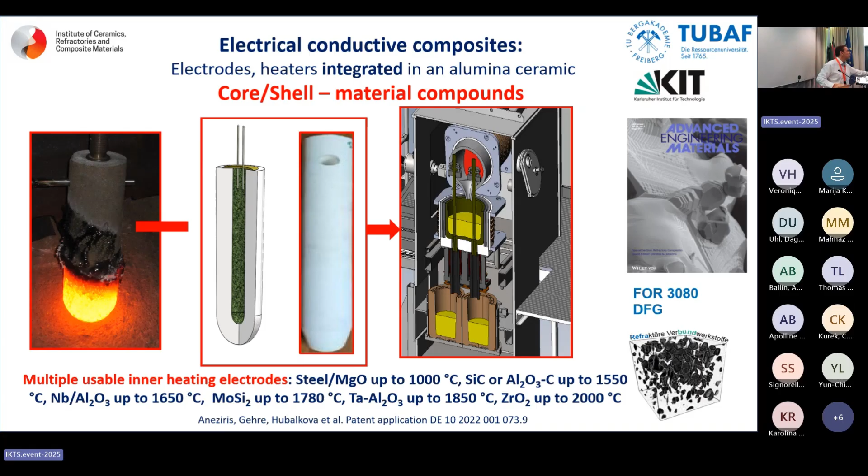Of course, somebody would say, you have shown us filament 3D printing, and you make bigger things. During ECerS, there are the groups of Paulo Colombo, Choca, Georgia, and so on. Georgia was also guest editor in this special issue that Alexandra showed us. And they are doing 3D printing. We have also a 3D printer.

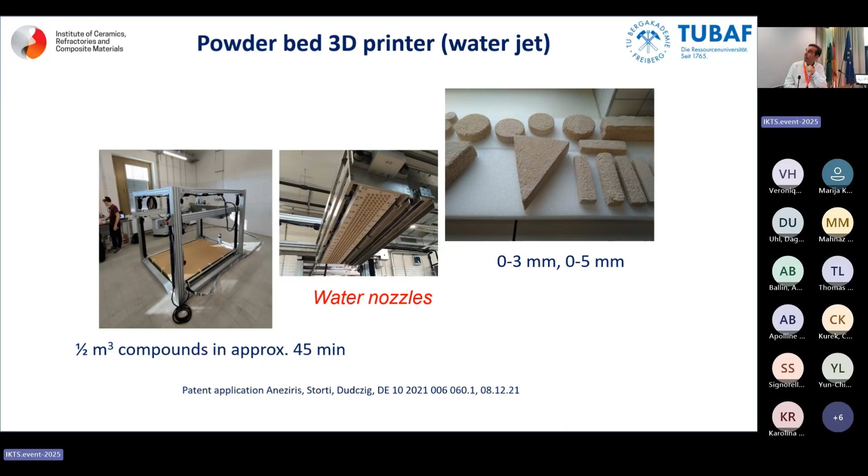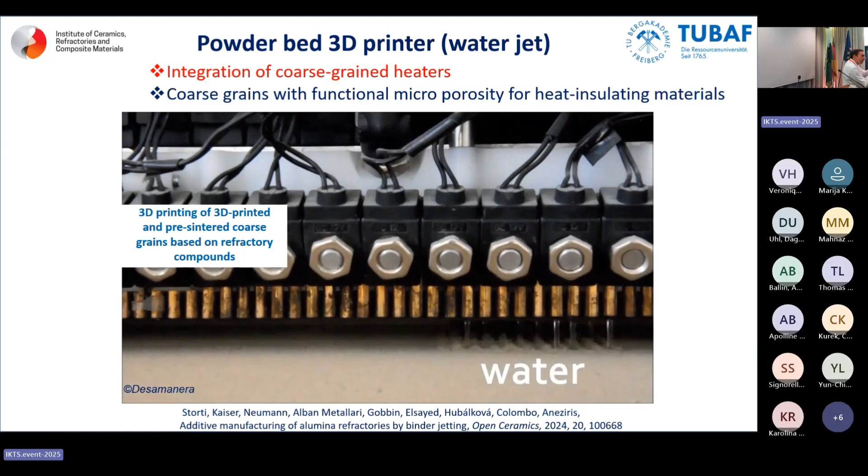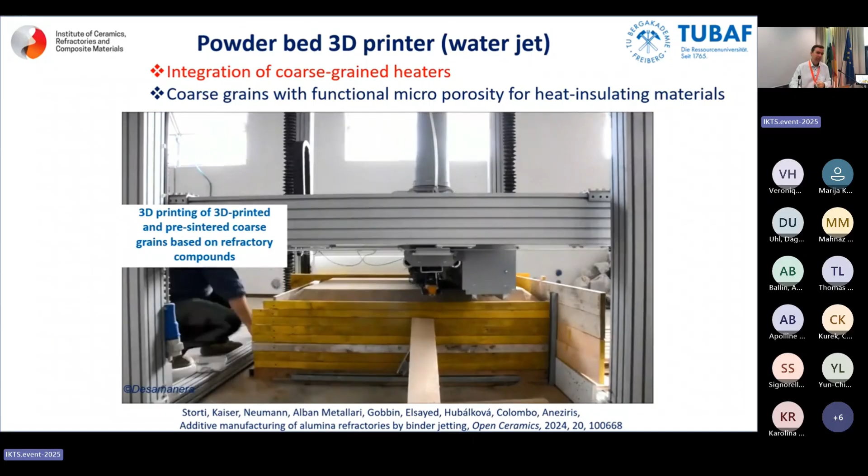And the question would be, can I make 3D printing of 3D printed coarse grains? Because if I have 3 millimeters, if I have 5 millimeters, I can design my grain. I can put in the electric conductive issues, and then I can make some special structures, big structures, fast, and so on.

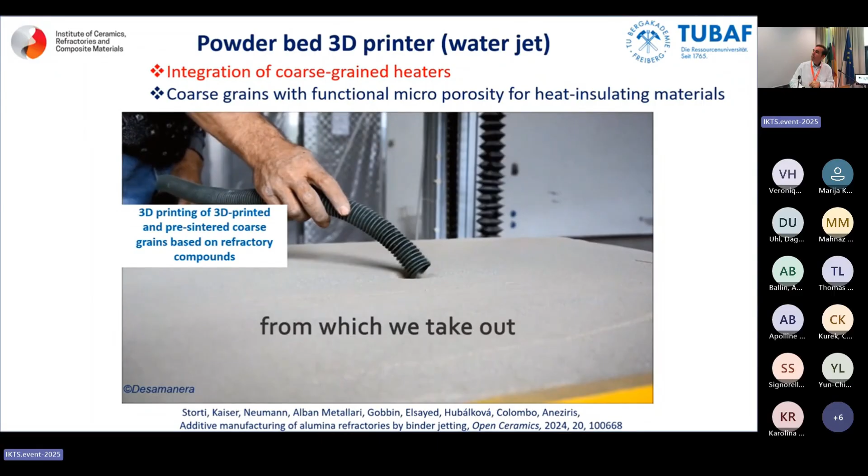But let's see the component.

Yes, it has to be clean, yes. So they're not the reactive powder, of course. Okay.

And closing, I would like to give you some inspiration. Why can we not combine a microwave plasma burner with microwave coupling? Somebody would say, what is this? Yes, if you have steel and you put steel in the microwave in your house, you will have an arc. But if the steel is melted or the aluminum is melted, then you have an interaction with microwaves. So what about having a big generator? And this is not a fiction, it's a vision. Having microwave power in order to get an ignition and to use it as a burner. And when you reach the melting point, you apply microwaves.

We are also going to start in November this year with an induction plasma burner, a rotary kiln with induction plasma burner. Somebody would say, why? A lot of the processing routes, cement industry, not only, are dealing with this. And of course, if you have carbon bonded systems, which have to be pyrolyzed, or also silicon carbide based systems, you can put electrodes and use them as a heating element during the pyrolysis. So you apply the energy directly where you want. Perhaps you could also create special structures.

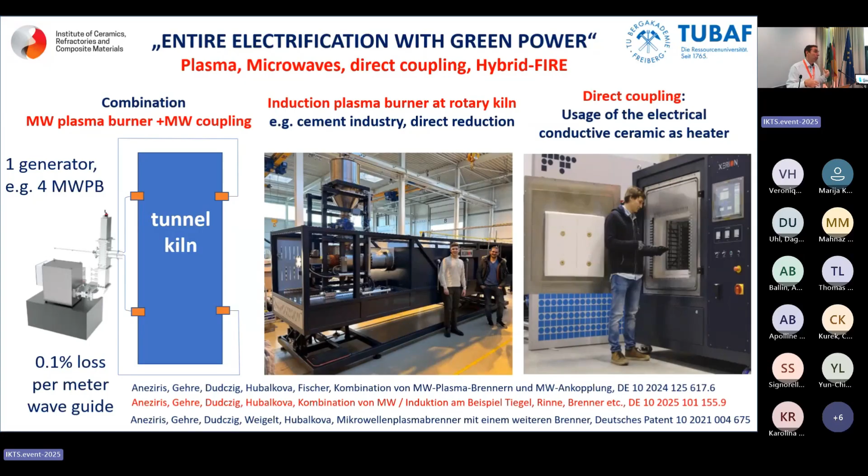And at the end of the day, this is ECerS. This is fire. This is the networking. Get the advanced ceramics with functional ceramics to refractories. And from the refractories, from what we have learned, what could we improve?